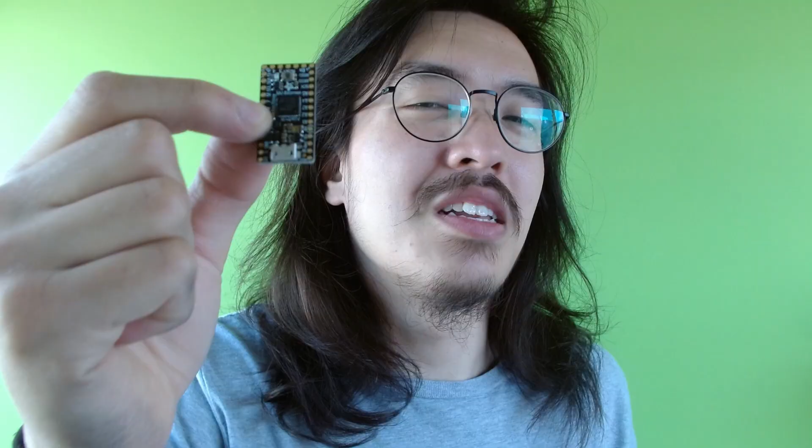On the one hand, I would like to do something that is almost like a normal consumer product that you just pick up out of the store. However, I want something that's going to be really out there, really weird, really quirky.

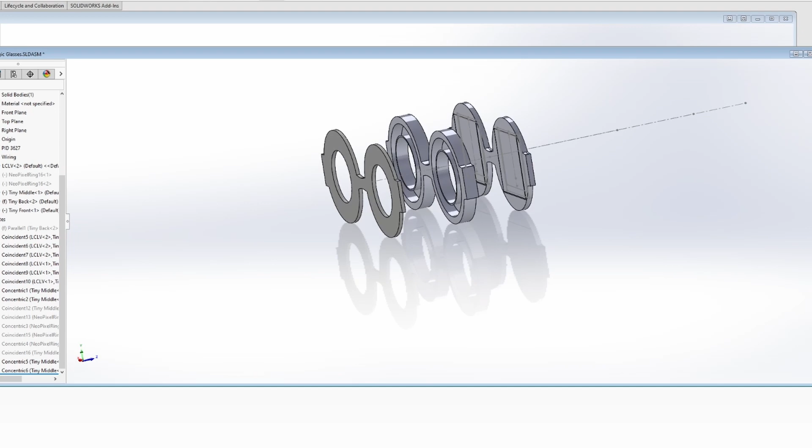What I'm going to do first is a rough CAD model. I'm not going to dimension everything, just put all the components in the computer, rough sketches. So you can kind of see it's multi-layered. I'm going to have the lenses in here. Then I got the same thing for this one.

I got printouts, I could hold it up to my face. This is a good idea to just test. I just wanted to test how they work on my face. So it's going to be a little bit like this. I think I need to make them a little bit wider. Yeah, it's not that much different.

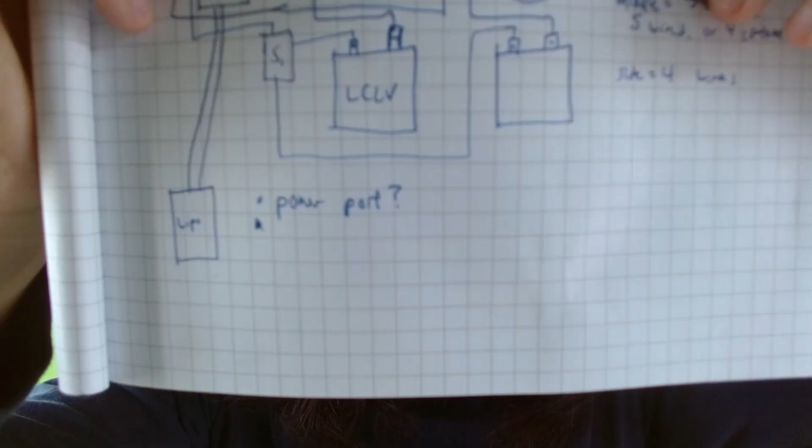And we got this one. Also did the wiring. I got the mounting holes, got space for wiring if I open up this part. Then I started doing this side, just getting it outlined. This is going to be full of computer chips and wiring.

I also did an update with this. I kind of did this by accident, but I like it. It takes a lot of effort to imagine things. I can kind of picture it in my head, but the details are fuzzy.

A simulation, even if it's not perfect, will help me with shape and size and color, and that's what I wanted to figure out. That was a nice burst of motivation.

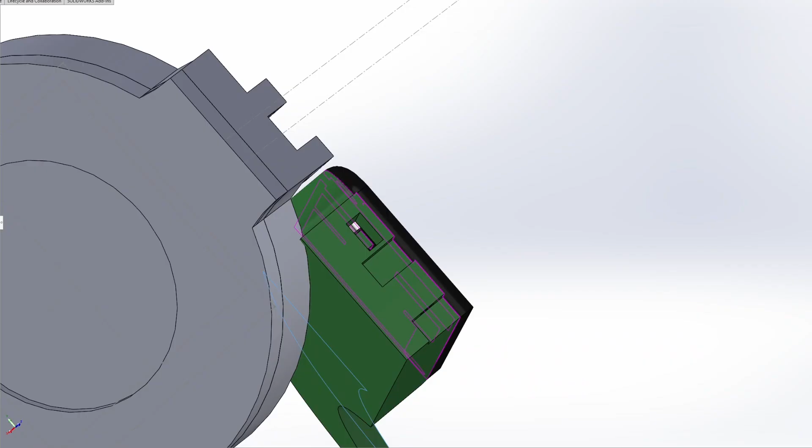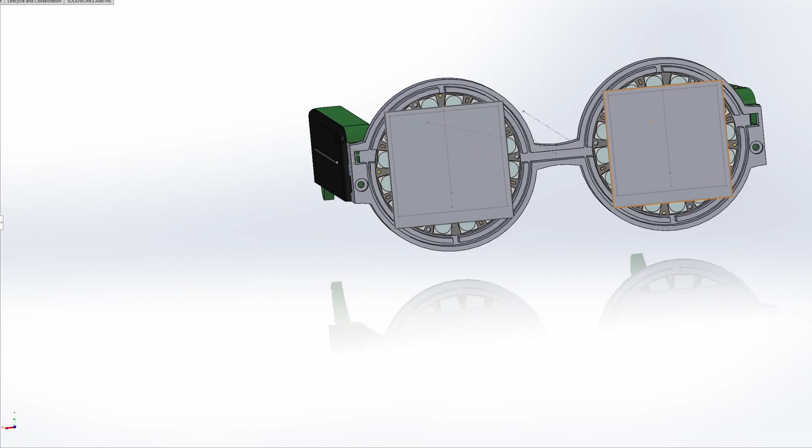However, there's a lot of work to be done in CAD. I took time to iron out all the little details, running through how I'm going to wire things, running through how I'm going to assemble things in my head, little tweaks to make sure that everything is perfect and I won't have to do a reprint or order another part. I'm trying to put as much work up front to catch those bugs and errors sooner in the process rather than later.

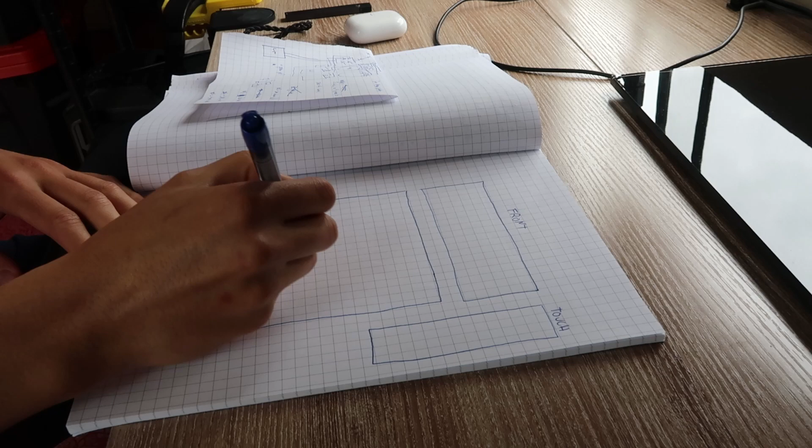At a certain point though, you have to press forward and there's diminishing returns. When you go over the whole workflow again and again, you'll find that rather than having a couple errors, you might have one error or no errors at all.

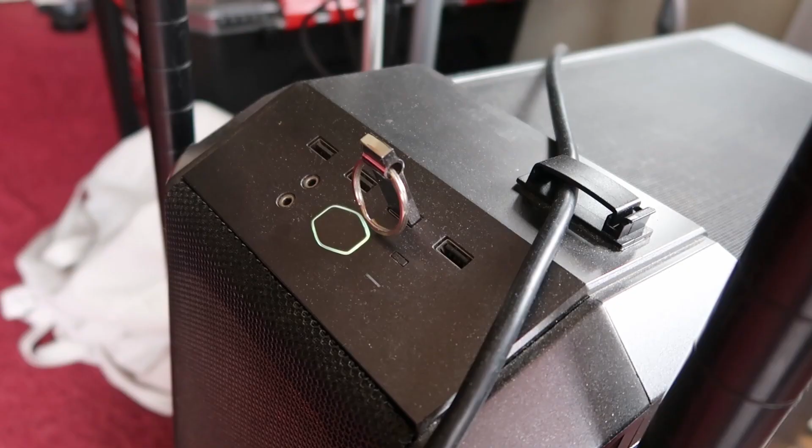I'm at this point where I feel like I'm ready to pull the trigger, order the parts, get stuff in the 3D printer. So now I'm moving into the physical world, I'm going to see my designs come to life. It's going to be a couple days of printing because I'm going to do it on and off. Hopefully nothing goes wrong. Then there's going to be that moment of truth where I'm going to see if everything comes together and it works.

How is it going? Wrote some code, didn't take very long. Here's a montage. If there's only a couple things off, then I'll be happy.

I got everything printed. I love 3D printing because it's very easy to make custom components. I can't imagine doing this by hand, it would take so many hours and hours. I'll make the printer do the hard work for me.

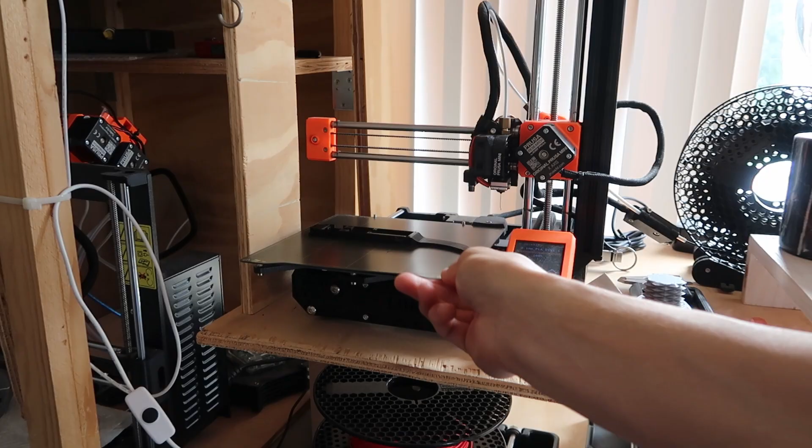Unfortunately, the printer is slow, and that's okay because I could just set it off, wait a couple hours, and then come back. The other disadvantage is that you can't print in midair, so you gotta have support material, and once the print is done, you gotta take off that support material. It can be annoying, you have to design around that, but it also can be very satisfying when you peel it off.

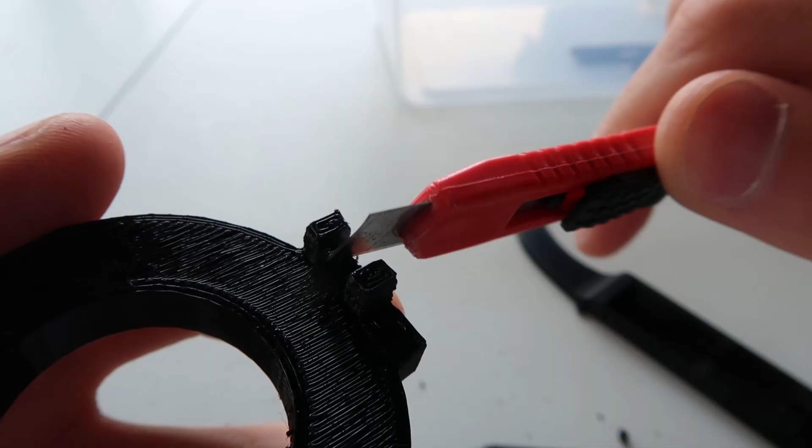I'm getting all of the parts together, so we have the hardware, the electronics, the software. Now I'm going to be doing a lot of handwork, testing. It's going to be cool. It's coming together, yo. Oh yeah, baby.

Unboxing time. These components are the last piece of the puzzle. It's time to put it all together, montage style.

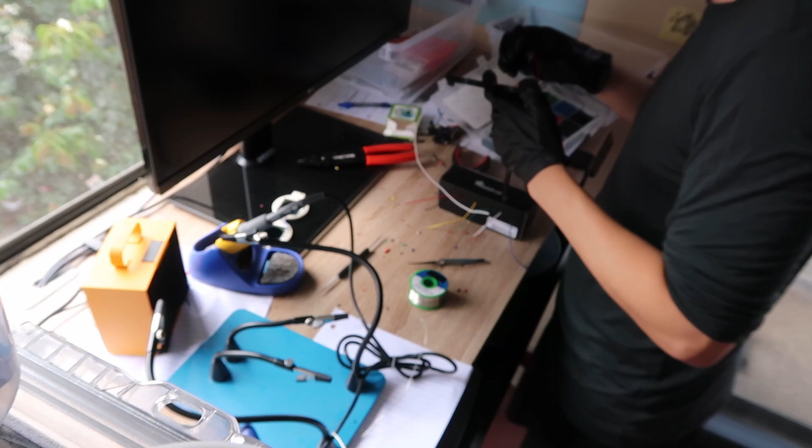After all the hours of soldering, all the hours and hours of work I put into this thing, it's finally done and assembled. Look at it. It's complete. It's done. Look at this thing. It's ready for me to try on.

It's got the on switch. I just gotta turn it on and then I can see it working in action. This is the moment of truth. I'm going to see if all my hard work is going to pay off, all those hours and hours of doing things. Moment of truth.

Let me take these off. Gonna put them on. I'm touching, nothing's happening.

All right, time to debug. Let's see what's going on. Had to swap some zeros and ones. Alrighty, let's see, put it on. Oh, gotta take my glasses off. Let me set those aside. Gonna put it on. Okay, ready? Oh my god, oh my goodness.

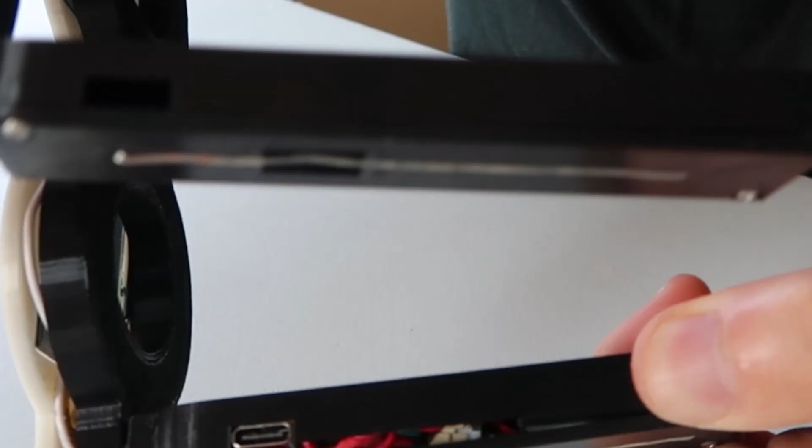It's still too small in the face, there's not enough space for wiring, and the logic code doesn't quite work. So I gotta fix that and circle back, but at least as a proof of concept, when I did that touch and it worked, that's what I'm looking for. It felt so good, it felt so satisfying. Yes, now it's time to perfect it, because it just kind of barely works. So now I'm gonna make it so it works reliably and works good.

Check it out, I'm nice and stylish here with the new one. It's not as messed up. Look at this, it's got a new startup sequence. So the wiring is still not that great, but it's a lot better than the other version. That's something I had to find out while testing.

Also, a lot of people tried to bend the hinges when I showed them, and since it wasn't sturdy, it actually broke. I anticipated me not using the on and off switch too much, but it turns out that I actually do. So I designed a mechanism for it.

So yeah, the thing about this is when I was tapping the side, I originally pictured myself doing this, but in practice I did this. The touch wires, I had a different design for that originally, but I went with this because it's version 3, and also because I just kind of like the simple, clean look.

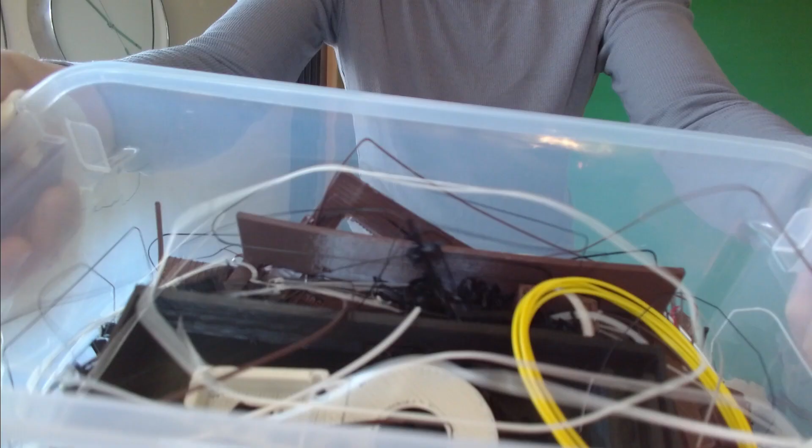This right here is version 1. Then there's version 2, version 2 is going into the scrap bin to get recycled. This is version 3. There's still some stuff messed up with it, but at this point I want to move on.

Honestly, just because I wear glasses, this isn't going to work for me. This is just a concept thing, and also it's a pain in the ass to make it so simple - just because it looks simple means I have to hide a lot of the complexity, spend a bunch of time trying this out, taking it on and off, turning it on, doing the touching. I think I came up with a name I like: Super Shades. They're like regular shades, but a little bit extra. So I like that, Super Shades.

But remember, I actually had 2 designs. Super Shades and hyper shades, baby.

Which came apart. It's got little hooks that hook over my glasses. Here's what it looks like, it's almost like a face mask. It takes up so much space. I actually really like how it came out aesthetically, but on my face it's way too freaking heavy, and I just don't see myself wearing this without being super uncomfortable.

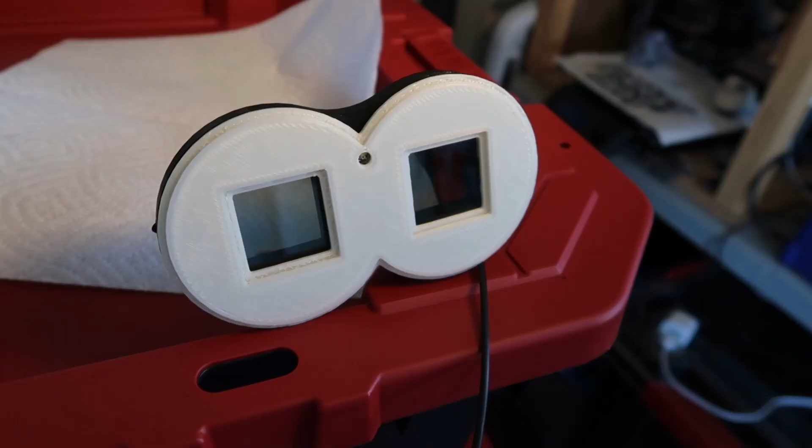My favorite thing is definitely the auto-darken feature. I should have spent more time on that - it was simpler than I anticipated. Also, since it's so big, I have to tether it to a battery, which isn't that big of a deal. I can put this in my pocket and it kind of looks like an earbud almost.

After going through all of that, my main takeaway, what I would do now if I could do it over, is to just make the smaller version even simpler. Don't put in any lights, just make it auto darken, and perhaps even fit my prescription lens in the 3D printed frame. And then this bigger one, it's getting too big to put on my face.

But I really do like all the light stuff, especially the heartbeat and the timer. I think that would work really well with some sort of fitness thing, like if I put it on my bicycle to display my heartbeat, and show the time elapsed since I worked out, I think it'd be really cool, especially riding around at night. Or I could have a heartbeat hat or a heartbeat pendant that's on my heart. There's a lot of cool things that I could do.

Overall, cool project, but I'm considering this one a failure because even though I did a lot of cool individual parts, it didn't come together how I envisioned. I went in way too many directions, and I didn't focus, and I didn't say no. I tried to do everything, and I didn't get to do so much polish.

The things that I actually did polish, like working with the touch and the design of the first version, I really liked the first version's design. So if I had to do it over, I would pick very carefully rather than getting caught up too much in the ideas of 'I should do this and that.'

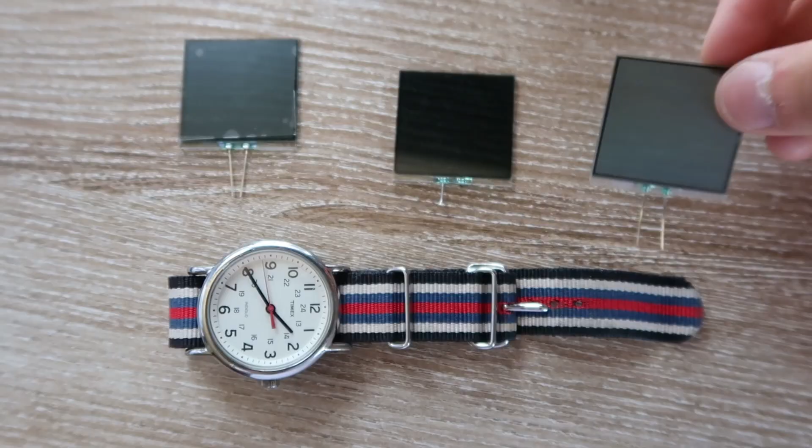So I went online and bought anti-reflective coating, and it seemed to work, but it blocked out visibility. I tried spray paint. Ultimately, it didn't work. I think it had something to do with the way the glasses were polarized, so I redesigned the whole thing to work more like flip-up glasses, connected to a motor that would activate in the sunlight.

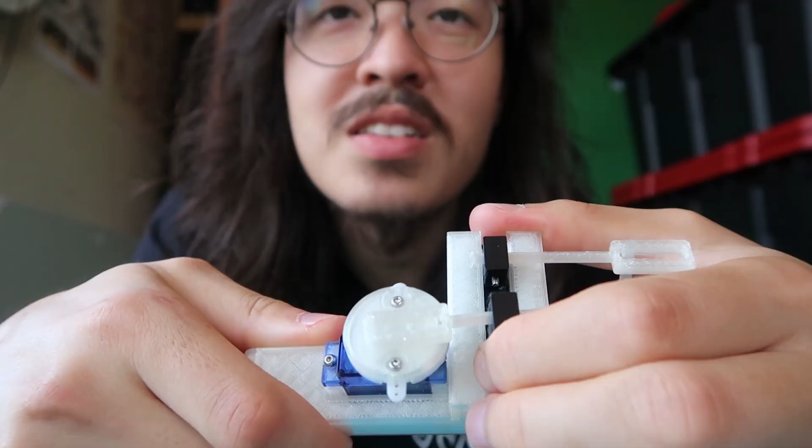It also worked around my prescription lenses. The first mechanism I designed was too complicated. I ended up scrapping that, moving to something a lot simpler, just a little string that pulls up, and that one did work.

It made things a lot simpler and cleaner, besides the wiring, which I decided not to optimize and just threw together because I wanted to test it. I wanted to put them on and see if it was light, comfortable, satisfying to use. And for those criteria, it did work. It does look a little strange and goofy, with stuff sticking out all over the place, but it does its job, and it does its job well.

So at this point, with version 3, I'm satisfied. There are some improvements I could do. You do need to charge it with a battery, and if I made them solar shades, I could have infinite charge. I also really need to do a PCB.

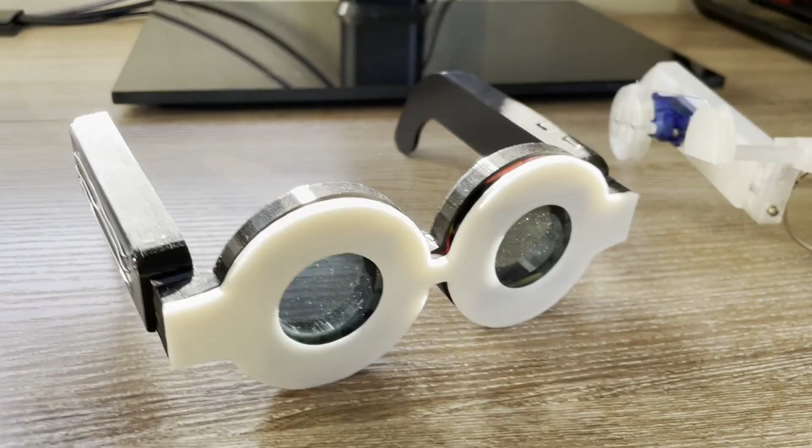If you look at the version on the left, it's very clean, but it took a lot of effort to get everything packaged up nicely. If I made a printed circuit board done by a computer, it would be less manual work and an awesome product.